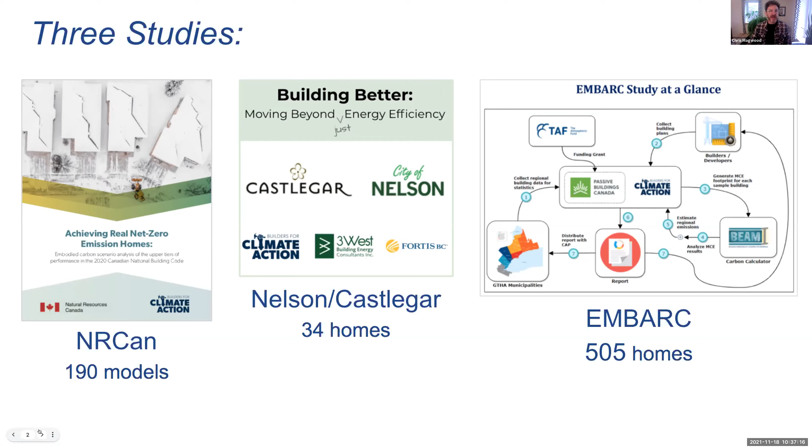And then one case study of an actual building up here in Peterborough at Trent University, where the client, the university, decided to really pursue low embodied carbon materials. And I'll show you how that unfolded.

So a quick recap, if you weren't here last time, the way that all of these calculations happen is we find the emissions information for different building materials and products in reports called EPDs, Environmental Product Declarations. Those are an ISO standard way of reporting on emissions and making sure that the same things are being included and excluded in those reports.

And then we load all of those EPD results into one of two tools. They're kind of the same tool with some slight differences. Either the MCE squared tool from Natural Resources Canada or the BEAM tool from Builders for Climate Action. Our team here built both of them. They're both spreadsheet versions. They use all the same source data. You get the same answers, but there's a few differences in the interface and reporting. Some studies used one and some studies used the other.

So they're both there. And so what we get out of those tools is an estimate of the material carbon emissions. I want to make that really clear. This is very similar to the information you get out of an energy model or a fuel mileage report, where we're taking data that was assembled in a certain way and processing it in a certain way to get a result. It doesn't mean that any of these buildings have exactly the carbon footprint that we're ascribing to them. But what it means is that comparatively speaking, if we make swaps or make different choices in the buildings, we can see what those results will be.

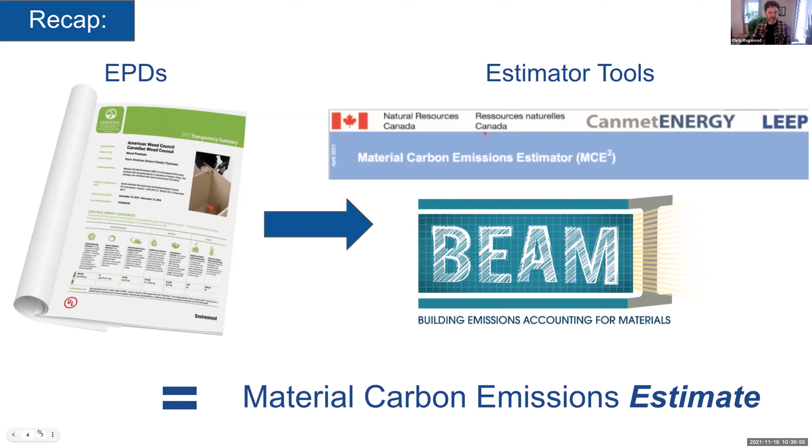So all of the information that we're tabulating for these buildings and these studies is in the cradle to gate or the product phase of life cycle assessment, which is where 70 to 85% of the emissions over the whole life cycle live when you're talking about building materials.

And just some caveats here on the right. We don't have an EPD for every single product. What we have is representation in every product category, but we don't know sometimes a specific brand of insulation versus another brand. What we do know is we have some representation of fiberglass, some of mineral wool, et cetera. The calculations are based on industry averages. So your own practices, how you frame walls and how much lumber you use, might not be identical.

We don't include waste factors or a whole bunch of parts of the building for which we either don't have data or for which we wouldn't be coming up with any actionable results. So right now that includes all mechanical, electrical, and plumbing, fixtures, flashing, sealants, barriers, appliances, millwork, stairs, paints. There's a bunch of the building that we're not capturing. We're not capturing transportation of the materials to a job site or emissions that happen during construction, and we're not including end-of-life emissions. We're including the lion's share of the emissions that happens up front when these products are harvested and manufactured.

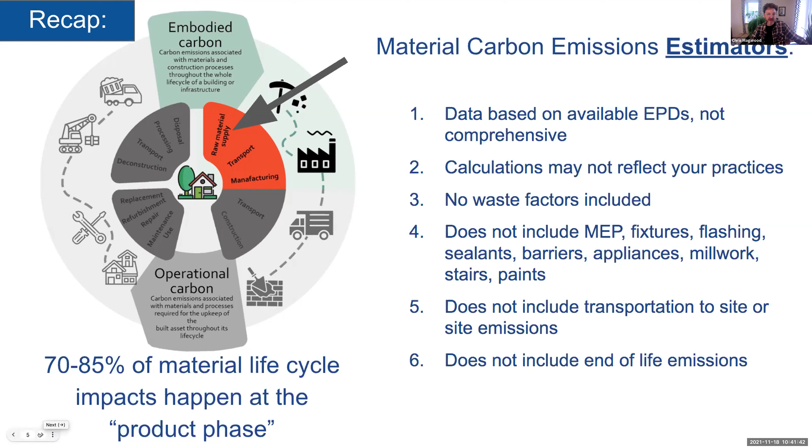So I'll get into the first study, which is one that we did for Natural Resources Canada. And the subtitle to the report is Embodied Carbon Scenario Analysis of the Upper Tiers of Performance in the 2020 Canadian National Building Code. So what we were looking at is, what is the relationship between moving buildings higher up the energy code? So we were looking at tiers 3, 4, and 5.

We were looking at 3 different housing typologies, a bungalow, a 2-story, and a row house. And we looked at 5 different cities. So the energy models for these buildings were done by NRCan based on the climate data for those 5 cities. And then what we did was applied to each house.

So NRCan provided us with a set of plans for what they consider sort of the typical bungalow, the typical 2-story, and the typical row house. And then we chose 4 different material palettes for those homes.

One, which you'll see we always color red in the study, used high carbon materials. So whatever the category we were looking at, whether it was flooring, roofing, insulation, we picked materials that were at the top of the category in terms of highest emissions. Then we did a sort of moderate carbon model where we picked materials that were sort of in the mid-range.

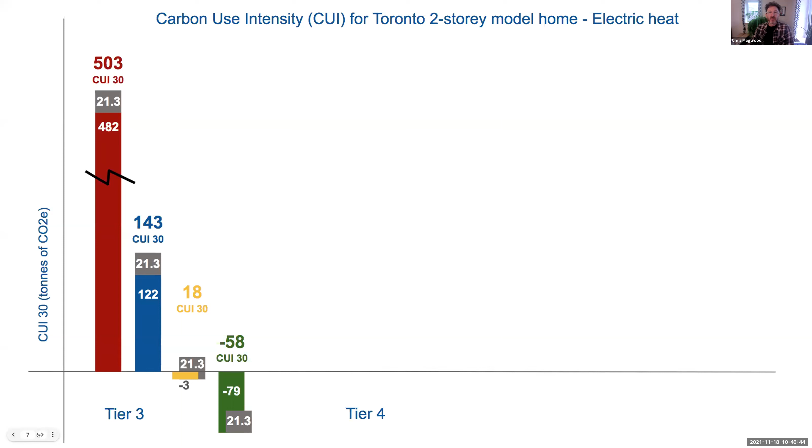So now we move this up to tier 4. Essentially what we're doing is adding insulation. We haven't changed anything else about the house, but in making it more energy efficient, there's no carbon footprint difference to making it more airtight because you're not really adding materials, but you're adding insulation. And so that model shows that for the red and the blue typology, the material carbon footprint goes up some, because obviously we're adding insulation materials that have a carbon footprint. So you've kind of driven that up.

We have brought down the operational emissions, so that's gone from 21 tons to just under 19 tons. But what's interesting is that between tier 3 and tier 4, these two buildings actually have a larger carbon footprint after 30 years than they did in their tier 3 version.

What you see with the yellow and the green versions here is that the carbon footprint looks better after 30 years because by adding more insulation, and in this case the insulation is what's providing that carbon storage, we're actually bringing those figures down.

And then we'll move over to tier 5, and we see kind of the exact same thing happening. The red and the blue models continue to have their material emissions go up. The operational emissions come down, but especially with the red model, it's sort of a net gain of carbon emissions because of those high carbon insulation materials. And you can see the blue model is almost equal here.

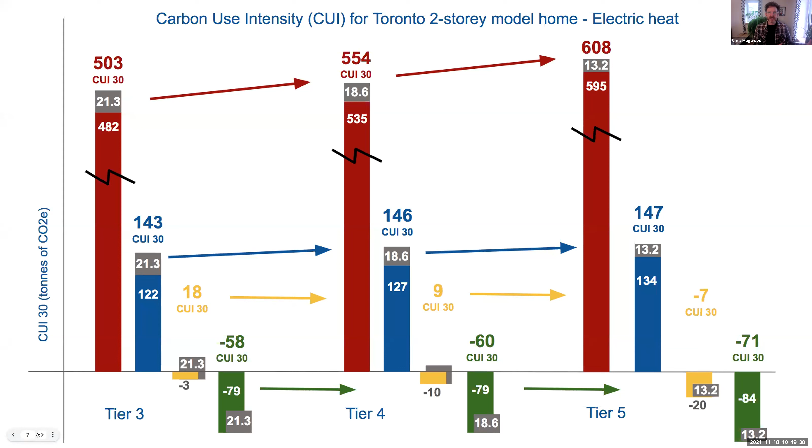And then, as I pointed out, we get the opposite effect if the insulation we're adding is a carbon storing insulation. We're kind of getting a win-win of add more insulation, which adds more carbon storage, which also improves the performance of the building.

Whoops, sorry about the slides there. But in this case, this is the same building in Toronto, but now using natural gas rather than electric heat. So maybe I'll just fill all of these in. Sorry, I didn't have a chance to review these.

So over here, our tier 3 building, the material emissions stay the same. You can sort of recognize the progression in that graph, but the operational emissions have gone up. So if we look back at the previous slide, they were around 20 and now they've gone up to 100. So this is pointing out that not only energy efficiency, but fuel choice and the carbon emissions of the fuel make a huge difference.

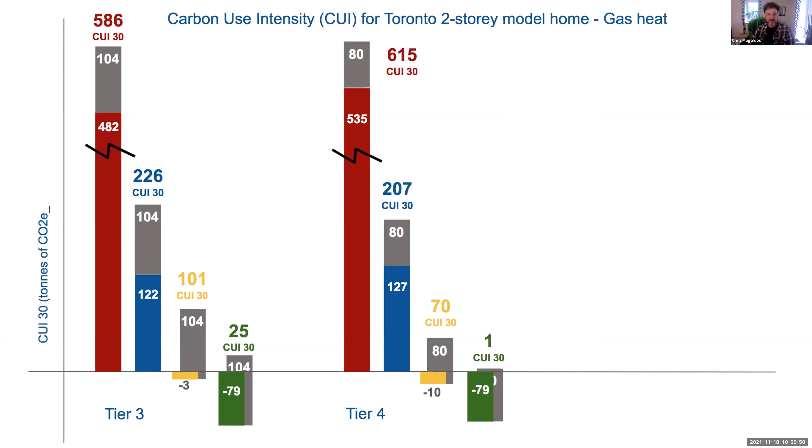But if you look between the Toronto example and this example, what you clearly see is that when the electricity source is relatively emissions intensive, like it is in Halifax, that's the best place we need to intervene. We need to get those buildings onto clean energy, because the operating emissions over 30 years really start to outweigh the materials, whereas in Toronto, the materials really outweighed the operating emissions.

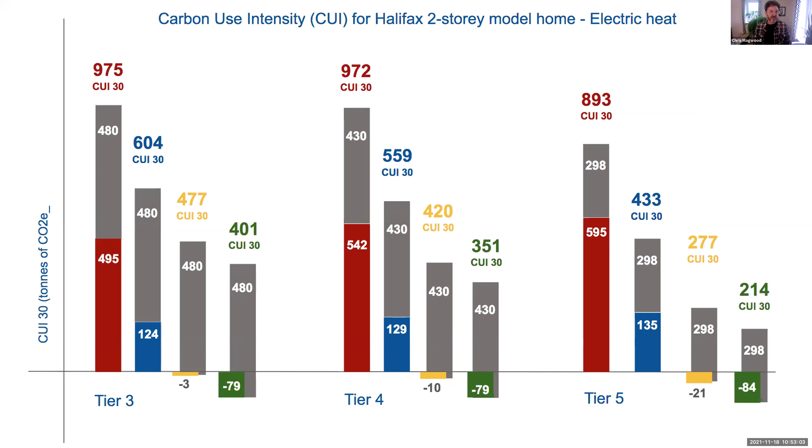And I think that's one of the key things that came out of this study is to say, this is the number we need to care about, this CUI number, and we need to drive it down in whatever way makes sense regionally. So in a place like Ontario, or the results were similar for BC, they were similar for Quebec, if you're dealing with relatively clean electricity and you can electrify those buildings, then our real focus needs to be on the materials.

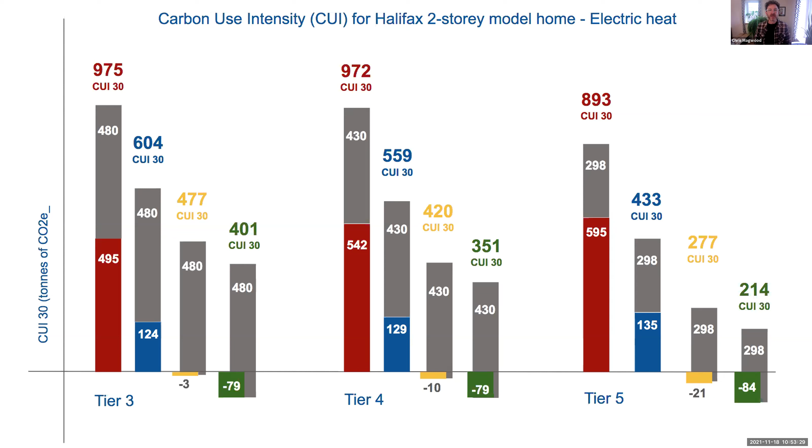If you're in Halifax, or somewhere else that's still using a lot of coal or other fossil fuels to generate that electricity, then you want to look at driving the energy efficiency of the building higher, but also working at getting the actual energy source to be a lot cleaner.

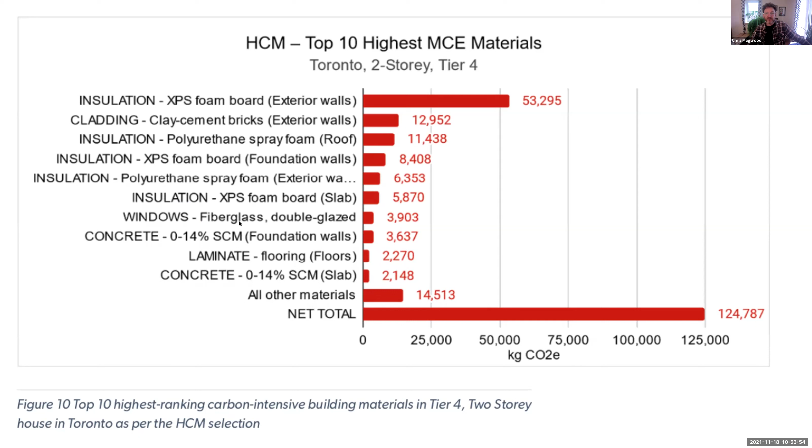And so this is just a really quick look. You'll have access to these slides, so don't feel like you have to take this all in, but this is the top 10 emitting materials for each of the buildings in that Toronto example. So you can see which of the things were kind of driving the carbon footprint of the building high.

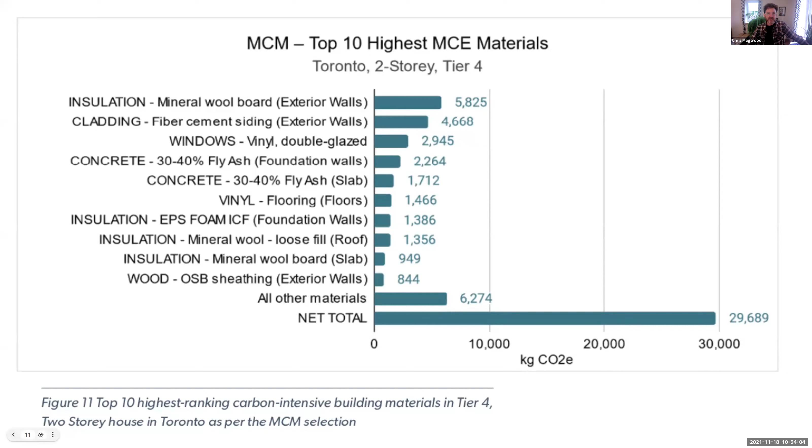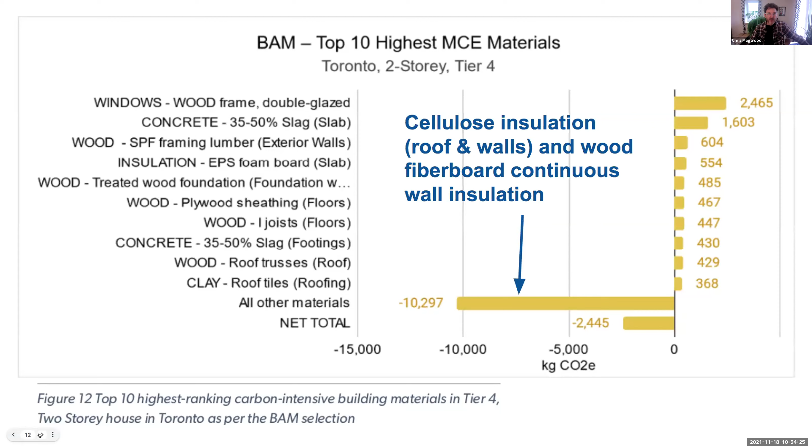And as we sort of move to more moderate levels of emissions, the material palette changes. It changes again here for the best available materials, where the negative numbers, all that carbon storage, comes from cellulose insulation in the roof and walls and wood fiberboard insulation as the continuous exterior. And then when we look at the sort of best possible model, the storage is coming from cellulose in the roof and straw bales in the walls as insulation.

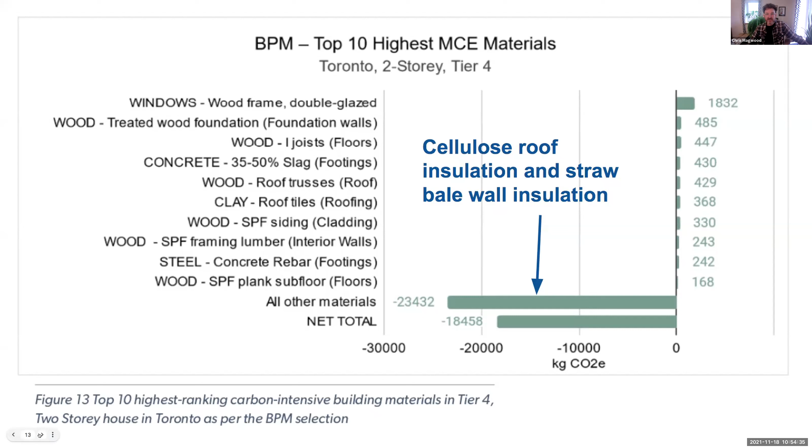So there's lots more. I would encourage you to check out the Enercan study. You can download it from Enercan's website or from the Builders for Climate Action website. There was lots more that we explored there that we don't have time to cover here. The work we're doing for Nelson and Castlegar, it's not quite complete yet, but we do have all the results, so I can share those.

So we looked at 34 homes, which is out of the total of 72 built in the region in that year. So it's a pretty good sample size. It's almost half of everything that got built. And it broke down into the categories you can see there in terms of housing typologies, which was a pretty good reflection of the numbers and types of buildings that get built in that municipality.

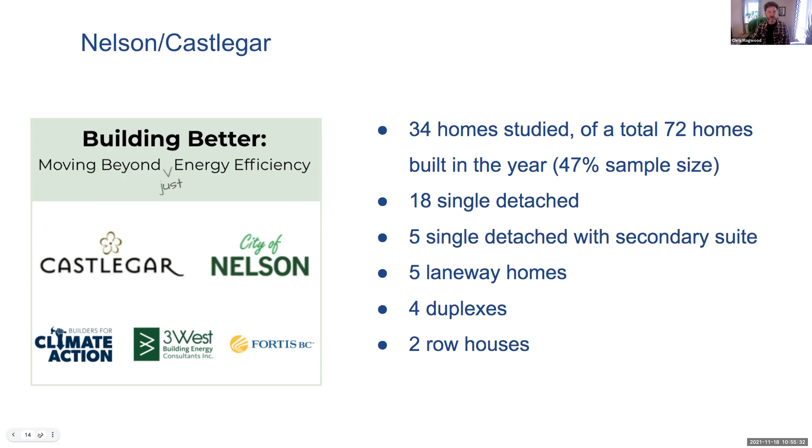So what was interesting is that the average falls pretty much right in the middle of those two, but it was a really even distribution. It wasn't heavily weighted to a few good ones and a few bad ones. If you look at a graph of all the results, it's almost like a straight line from the best to the worst. So there's a real distribution in terms of the overall carbon footprint of these homes.

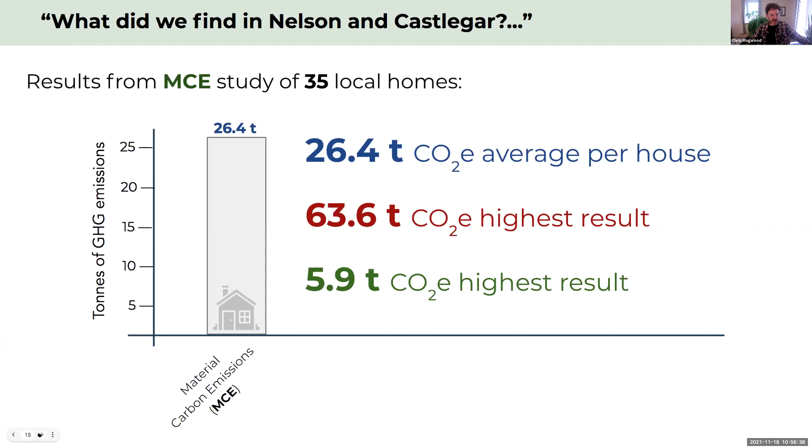And this one was exciting for us because now we're looking at real, as-built homes, and not models like we were in the Enercan study. So we built those models from HOT2000 models that a local energy advisor company, 3 West, had already done for those buildings. So using that, we were able to see that the average operational emissions from those buildings was just about 1.26 tons per year.

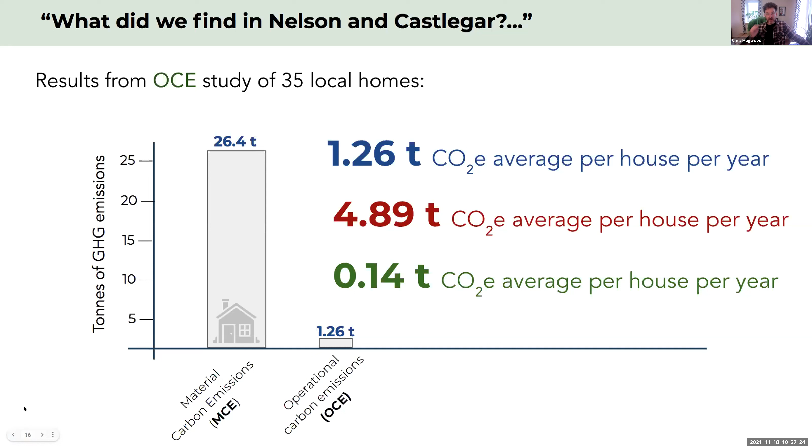But again, there was a pretty wide distribution on either side. The highest one was almost 4.9 tons, and the lowest was 0.14 tons. So again, the curve wasn't quite so even. There were a lot of really low ones and a lot of really high ones. And again, it had to do with fuel source, those that were on all electricity or those that were on fossil fuels.

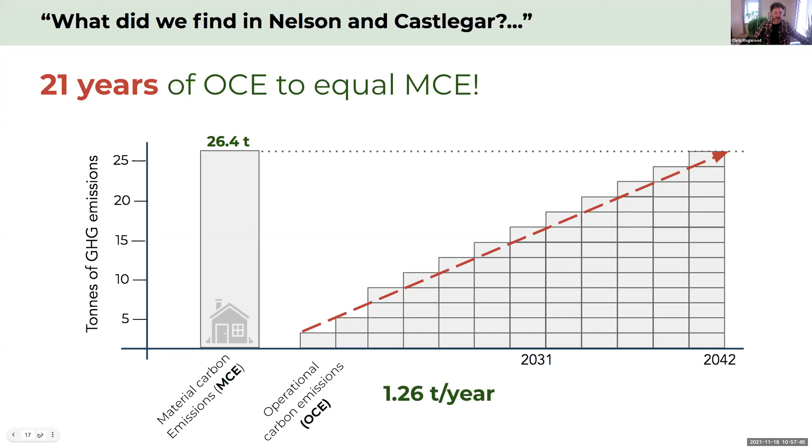But the thing that really drives home from this is that it's going to take, on average, in Nelson and Castlegar, 21 years before the average operational emissions equals the average material emissions. So for municipalities like that who are trying to drive emissions down by 2030 and 2050 targets, what this really points out is that you're not going to be making the kind of impact you're hoping to if you're only dealing with operational emissions. You need to be thinking about the material emissions up front as well.

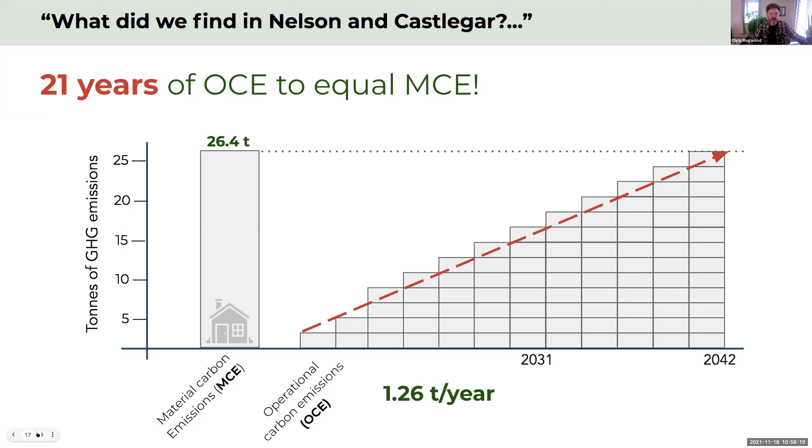And in some of these cases, the ones that were on clean electricity, 12 of the homes came in around that 0.14 tons a year. So for almost half the homes in the study, it's almost going to be 100 years before their operational carbon footprint matches their material footprint. So that makes it even more clear as we start to deal with operational emissions from a fuel source point of view and an energy efficiency point of view. It's just going to make these upfront emissions more and more critical to address.

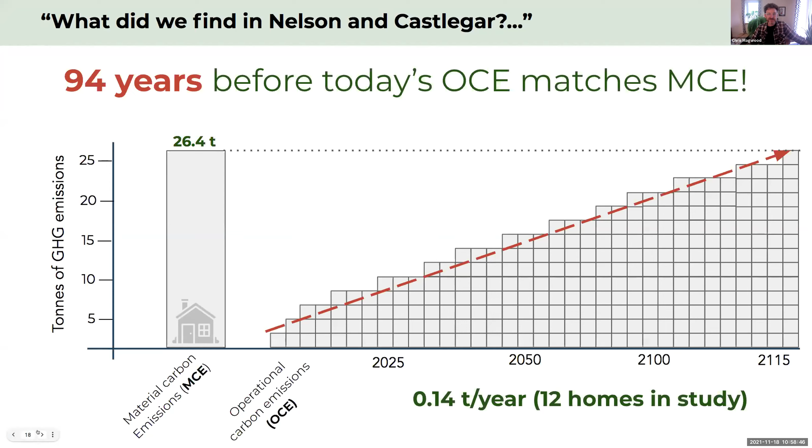Out of the Nelson study, what we were able to do is take an average of all the materials from all the homes. And this was kind of the distribution of the sort of weighted impact. So concrete was by far the highest contributor across the study. Over 35% of all the emissions generated from all of these homes came from concrete. Insulation was the next biggest category. There's a little asterisk there because some of those insulation emissions were offset by the use of cellulose.

So there's another almost 4% that would have been added to that insulation category, but the cellulose that was in that category kind of acted as a negative number on that and brought the overall total down. And then you can see that cladding and interior surfaces were pretty close to each other at just over 12%. And by interior surfaces, what we mean is flooring, wall cover, wallboard, and ceilings. So there's quite a few different materials buried in there, but they're very similar.

Windows was just a little bit behind at 11%, framing at 10%, and then roofing and structural elements were a pretty small contributor. So this was really helpful to start honing in on where are the places where we can make a difference for a municipality like Nelson and like Castlegar. Obviously there's no point in focusing on getting people to think about the roofing. It's such a small part, but we really want to think about things like concrete, insulation, and cladding if we want to start being able to drive these emissions down.

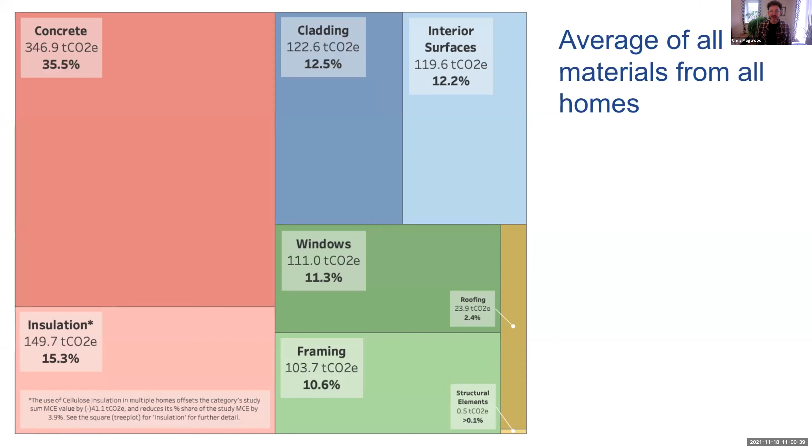And then the last thing that we did in the Nelson study was we took the house with the highest material carbon intensity. It had a carbon footprint of 309 kilograms of emissions per square meter of house area. And we thought, well, let's just switch out a few of those high impact materials. So we switched out in the model the average concrete with a high SCM concrete. So that would be, in the case of Nelson, a high fly ash version of concrete.

We changed the EPS foam insulated concrete forms to wood chip ones. We changed the wall insulation from mineral wool to cellulose, the XPS continuous insulation to wood fiberboard. We changed half of the hardwood floors to linoleum floors, and we put cellulose in the roof instead of mineral wool. And you can see we basically halved that building's carbon footprint with those 6 interventions alone.

And so this is not an endorsement of how somebody should build, or that these are the materials that somebody should be choosing. There's obviously lots of reasons and factors that you would use to decide that. But what we wanted to show was that with, in this case, six material substitutions, we halve the carbon footprint of the building. And so really the point of this part of the study was just to say, we can make a big difference, and it is not that difficult to do. And if these aren't the materials that you would choose, there are other places in the building or other materials you could use to make similar differences.

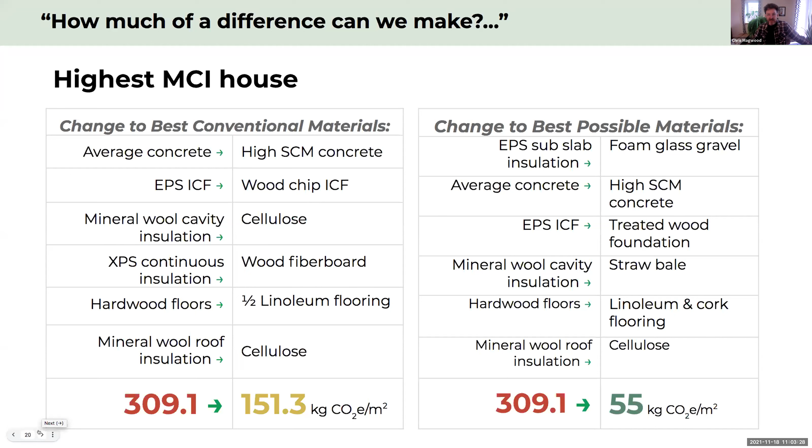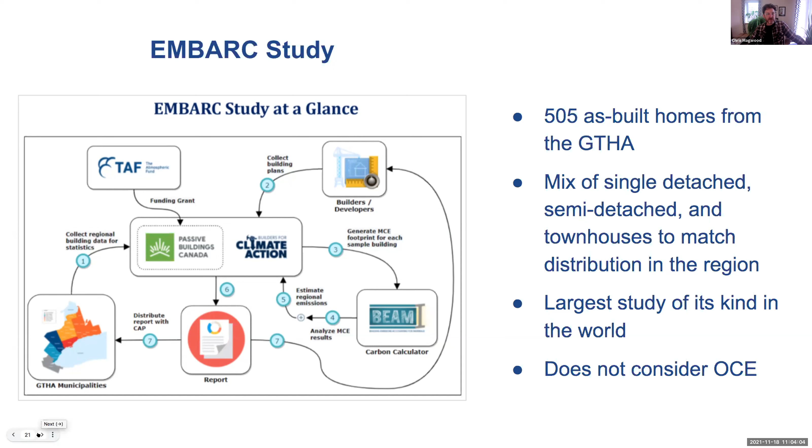And the final study is EMBARC. This is the one for the Toronto region. Here we're looking at 505 as-built homes, so very similar to the Nelson study, but a much larger sample with an appropriate mix of singles, semis, and townhouses to match what building numbers look like in the region. But this study does not include operational energy. We're just looking at the material footprint of the buildings. And like I said, it's early days. In the early part of the new year, we'll have this report out in full.

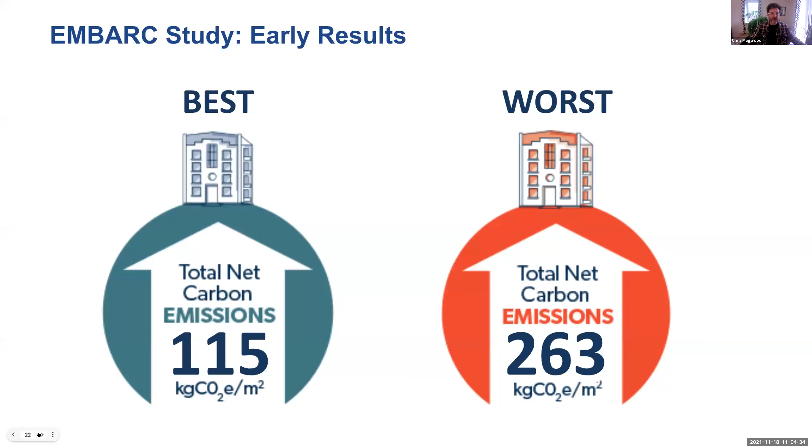But what we know right now is that in the GTHA, of everything we looked at, the best, in other words, the lowest emitting building, was 115 kilograms of emissions per square meter, and the worst was 263. So it was interesting. The best was nowhere near the best of what we found in Nelson, but the worst wasn't as bad as the worst in Nelson. So kind of more of a middle range in the GTHA so far.

So I just wanted to put these results beside each other, just to give you a sense that there's a picture developing here that we can start to learn from. And because these buildings are now coming from different parts of the country, looking at both model and as-built buildings, what we can see is that the range for the highest, the worst emitters, we probably overstated in the NRCan report, because we literally chose all the highest emitting materials, and clearly that's not something that people are doing as a general practice.

The highest results in Nelson and the EMBARC study are between this 260 and this 310 mark. So that seems to be a more typical high end. What's interesting here is that the mid-range average from the NRCan study was 150 kilograms of emissions per square meter, and the average in Nelson was exactly 150 kilograms, and the average in EMBARC is 180.

So those are much closer to being aligned, and in fact, depending on how we count the square meters, in the case of EMBARC, this includes garages but they're not included as part of the living area, so it drives the per square meter up a bit. If we just looked at square meter built area, EMBARC is I think 152. So this is a pretty good indication that the average lives somewhere in this 150 to 160 range. But at the low end, definitely, what we modeled for NRCan isn't happening all that much out in practice.

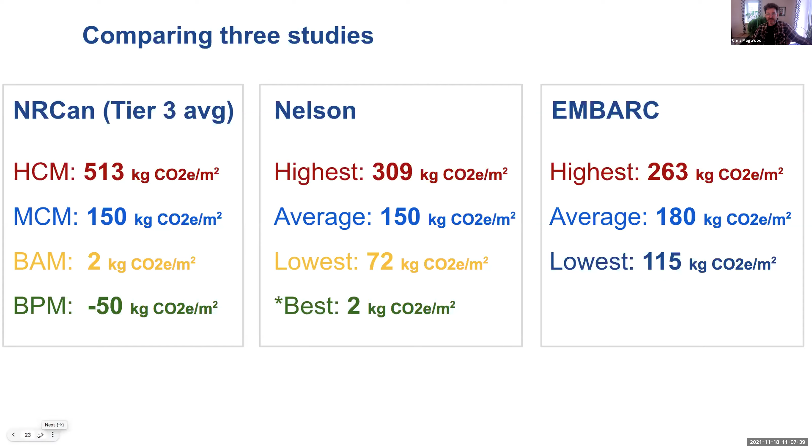The last thing I'm going to look at now is a building that we were involved with at Builders for Climate Action for Trent University. It's their forensic crime scene building, new construction on their campus, and they wanted to achieve a zero carbon building. So we worked with the ILFI's zero carbon certification program, which mostly focuses on the operational side. The building has about 43 kilowatts of PV on the roof, and was designed with really great building enclosure and air tightness to make sure operationally that it would be a zero carbon building. But we came on board to help them do the same on the materials side.

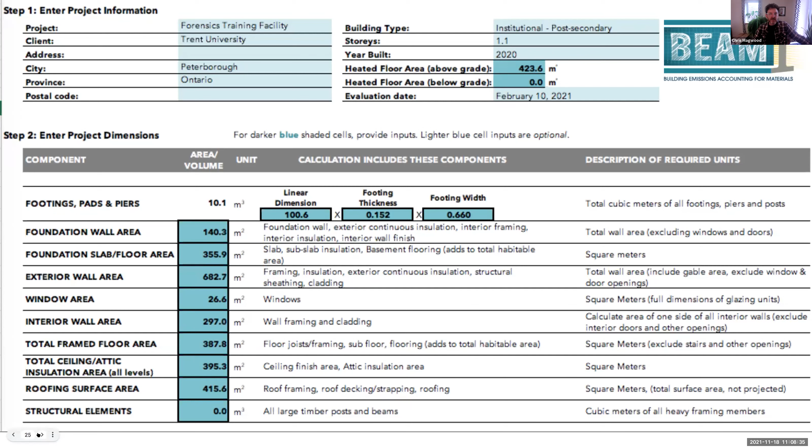So we used the BEAM tool. We entered all the key info about the building into BEAM. And one of the things that's really great about BEAM and the MC squared tool is once you've gone through the whole spreadsheet and selected all your materials, you get this review tab where, by each of the building assemblies, you can see all the materials you chose, their relative carbon footprint, and your total net emissions for the whole building.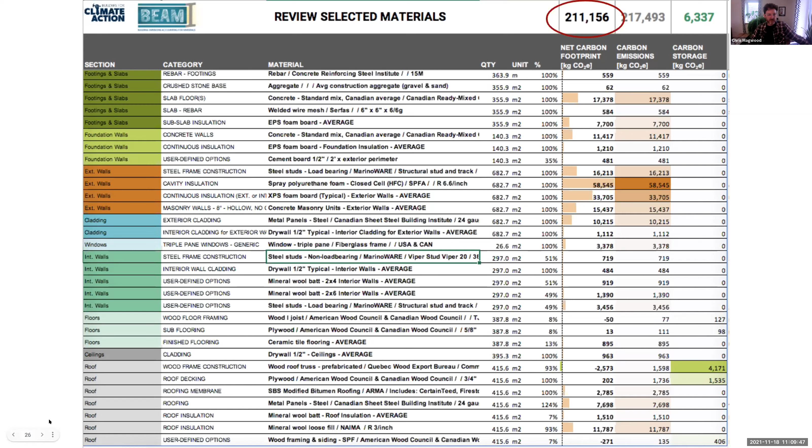And we then worked with the team there using BEAM to point out where we could make material swaps, where we could choose different materials. So in this case, we steered them away from the spray foam insulation and towards a mix of mineral wool batts and hemp fiber batts, et cetera. Through all the building assemblies, we were able to look at what material choices they could make that would both meet their budget and be able to bring down the carbon footprint.

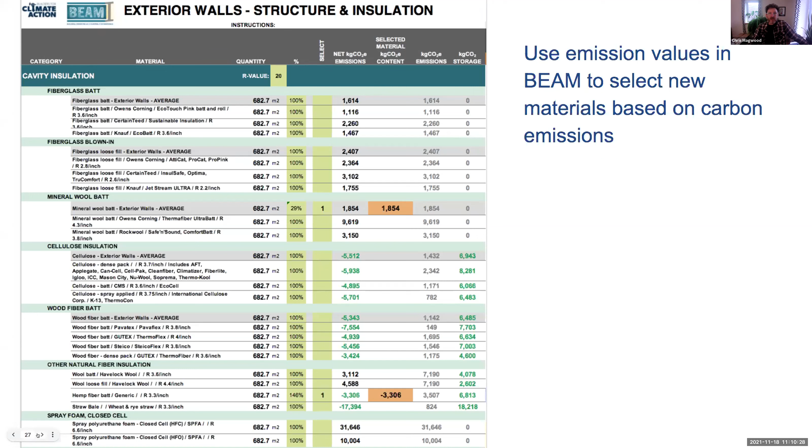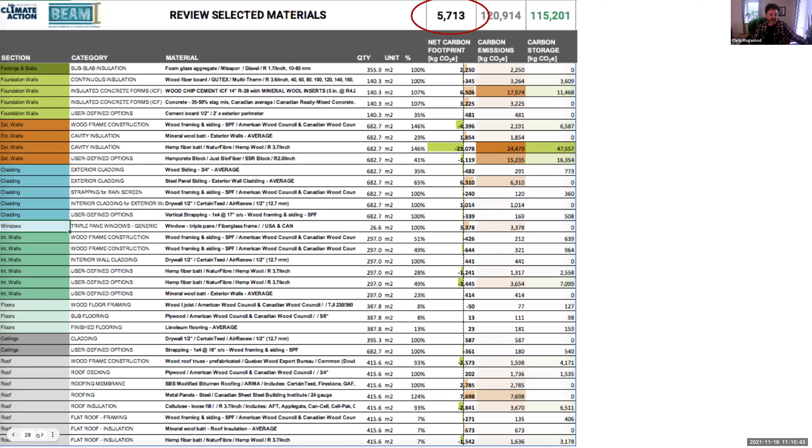So this is the review sheet for the as-built version, and you can see that we've brought the carbon footprint of that building way down, pretty close to getting to zero when you look at a per meter squared basis. And some of those material choices included things like the foam glass gravel as the sub-slab insulation. The walls were these interesting hemp blocks from Just Biofiber in Alberta, and hemp fiber batt insulation from Quebec.

And in addition to really thinking about the materials, we are also really thinking about the building enclosure. So we met passive house levels of airtightness and insulation. And in that way, the building met both the operational and materials side of being zero carbon. So side by side, we ended up taking a building that was bound to have 211 tons of emissions and got it down so that it was storing just under 7 tons.

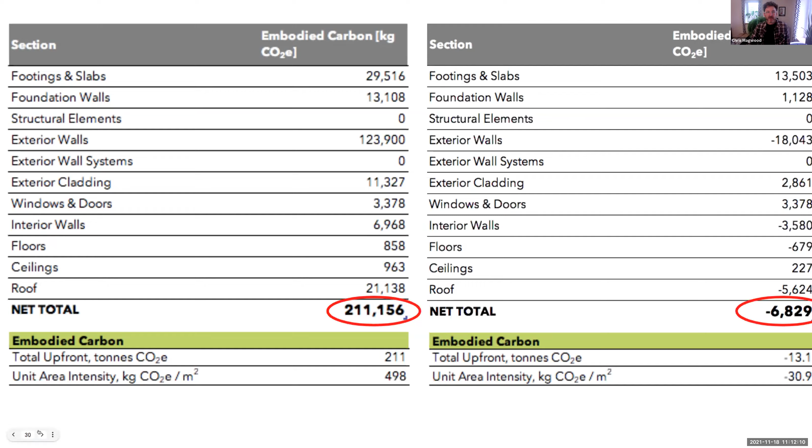And maybe not everybody in every practice and for every building is going to get to that level, but this is what's possible right now today. But if you can look at a building that's going to have over 200 tons of emissions and even get it down to 100 tons of emissions, we think there's a lot of value in using these tools and making this part of the overall strategy of designing and building buildings. So that's the finished building up at Trent. And that's the finish of my part of the presentation.

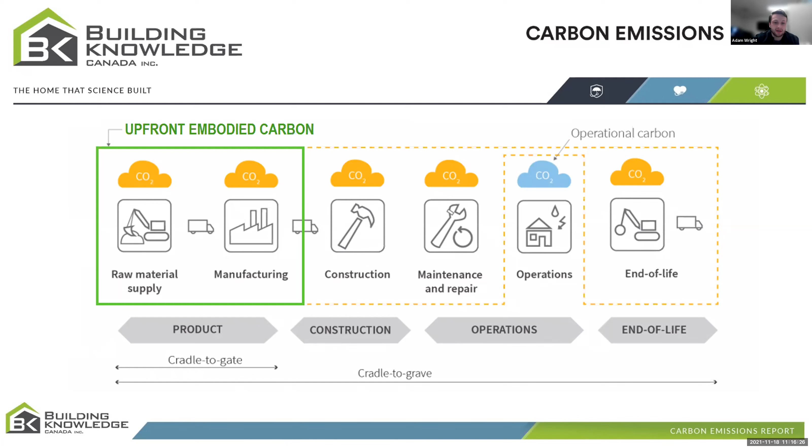So our initiative in this project was to provide a simple pathway for the developers to reduce their embodied carbon impact through smart material choices and applying these tools towards future construction. The tools enable us to measure and manage the amount of embodied carbon that was associated with the building materials and then choose lower carbon material options. And what we have found so far is that by simply asking suppliers for the low carbon options, we've been able to procure materials that meet our reduction targets and performance specifications with zero to minimal cost premiums.

So whether it is redeveloping an existing house or if you're building new, providing a design pathway can allow the builders to see the individual impacts of the material choices, and they provide similar low carbon product alternatives that can be implemented. So by starting with the design process, we are actively beginning a greener method to approaching construction, and considering low carbon structural materials such as green concrete, recycled steel, mass timber framing, and many others, we can make a huge impact on reducing the total tonnage of the carbon that's emitted. This also encourages the use of fewer materials in the buildings, and it can bring to light areas where repurposed materials can be substituted and ultimately reduce the developmental costs.

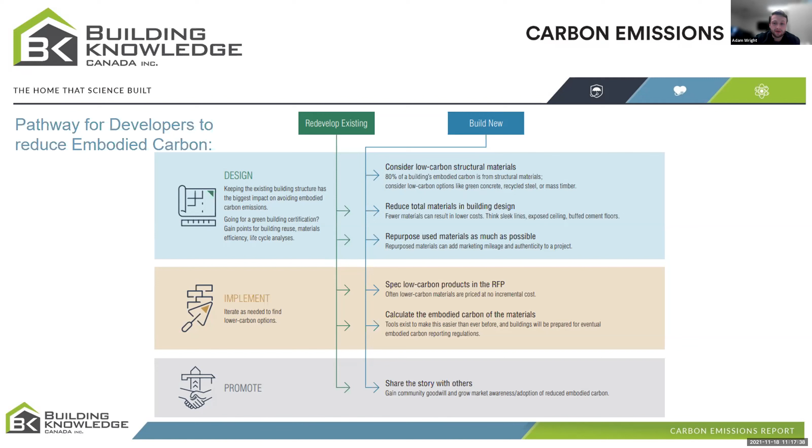So unlike operational carbon, embodied carbon can't be reduced in materials once a building's construction is completed. So as buildings continue to improve operational efficiency, embodied carbon will become a larger portion of the building's overall lifetime emissions. And although awareness of this topic is still growing, understanding and applying the embodied carbon is a necessary step to mitigate climate change.

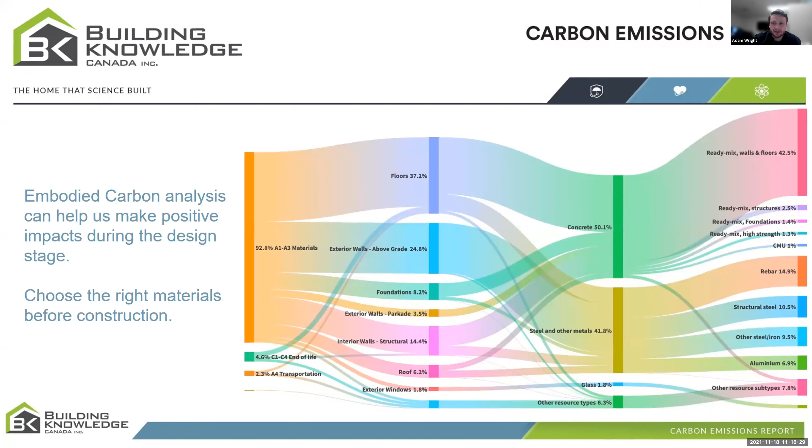Regulations are coming, with that being said. So as more cities are committing to decarbonization, and because buildings are such a significant contributor to emissions, it is expected that the climate action plans will limit both operational and embodied carbon. So staying ahead of this policy curve and adopting low embodied carbon practices now protects firms from the challenges and the cost of transitioning in the future. Because once a carbon tax is passed, developers will have a strong financial incentive to take action and reduce embodied carbon.

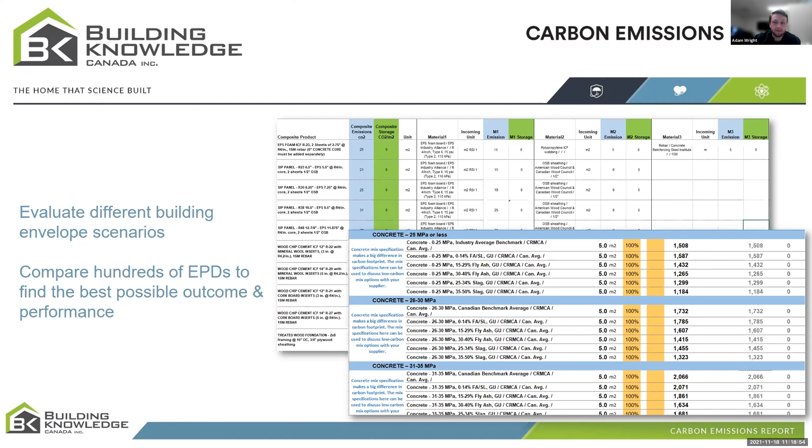So this is how BKC can help. Our tool can evaluate multiple building envelopes while comparing hundreds of EPDs from the NRCan calculator and Beam tool, where we can find the best possible products and performance results of the home. And our report can condense this material data into a readable format, and observations, improvements, and any comparisons can be made between the two in order to select the best possible design. So I'll pass it back on to Andy now, where you can talk about the report a little bit.

Yeah, thanks, Adam. So basically what we've done is we're trying to develop a report that uses both the tools of what Chris has created, the Beam tool and the NRCan tool, to give a builder a picture of the impact on the home. So for instance, we want to look at evaluating each new home type.

Oh, if we can just go back there real quick, Adam. If we can evaluate each new home type, whether it's a single detached, an attached home, or a MURB, what we're doing is we've set a simple metric where we look at the upfront embodied carbon, which is what Chris has been talking to us about. And then we look at the operational carbon, but we look at a 50-year lifespan.

Now, we get it, 50 years is way too long. We have a climate emergency. We need to do things sooner. The reason we've chosen 50-year lifespan is because in the National Building Code of Canada for Part 9 low-rise housing, 50 years is the approximate assumed lifespan of a low-rise residential product. So as a builder, developer, designer, when you build that asset, the expectation is it is going to have a 50-year lifespan.

Now, we understand when it comes to operational that there's a lot of other things that are going to come into play. Down the road, 50 years out, folks, hopefully we have incredibly clean grids with fusion and all sorts of things. But for now, we're building an asset. So what we're doing is we're showing the total 50-year footprint of the upfront embodied carbon plus the total footprint of the operational carbon reduction.

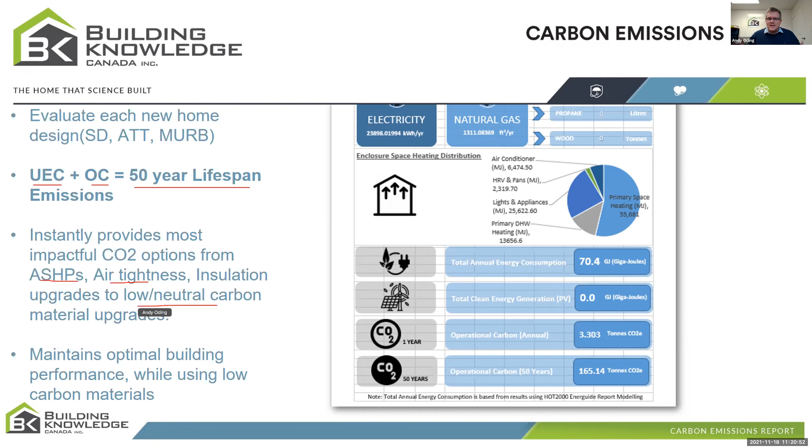So again, we look at these things. And from a developer, designer, builder standpoint, we need to know when it comes to reducing carbon emissions, do I look at air source heat pumps, or do I look at air tightness? Or do I look at low or neutral carbon materials? Where do I start to make an impact in designing and developing this aspect? So go ahead, next slide, Adam.

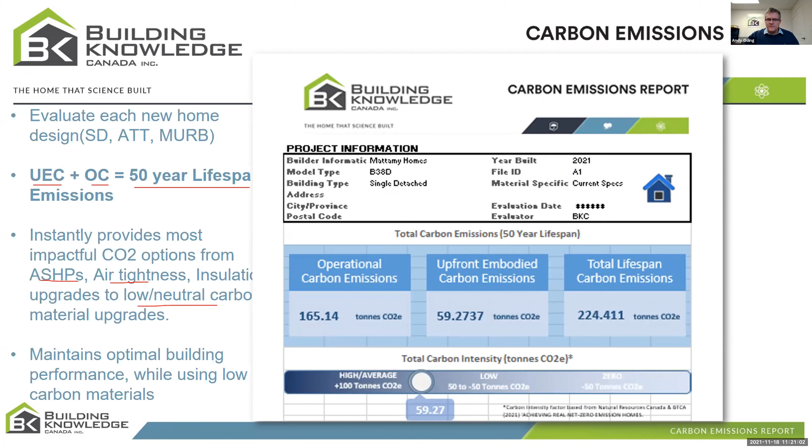So what you have here is, again, using the tools that Chris and Sona developed, for this single detached home, you would have tons of operational carbon emission over a 50-year lifespan. And again, we can look at 20, we can look at 30, but let's use the National Building Code. We have a total projected operational carbon of 165 tons of emission. We have an upfront embodied carbon total of 59. And when you bring those totals together,

the total lifespan carbon emissions then becomes 224. In the graph below that, we can provide the total emissions density in kilograms per meter squared, but really the big number that we're trying to look at is this number here, which is the operational plus the embodied at a 50-year picture. Next one, Adam.

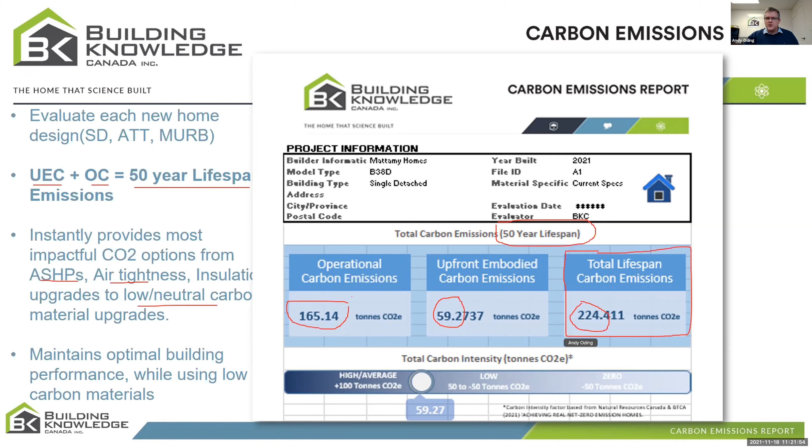So you can see here, this is a comparison that Adam gave. This is basically a building code based home using building code based products. And you can see that here we actually have a total lifespan carbon reduction going from 224 down to 199. Next slide. Next fly-in. There you go. And so now we have a 15% reduction in carbon, and we haven't even touched the operational side yet. And this is just simply from a small change to, let's say, the concrete going to a 25 or 30% SCM or something like that. Go ahead, Adam.

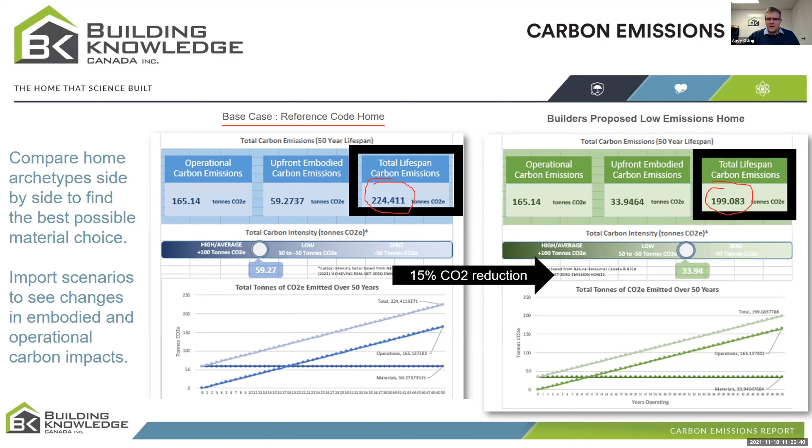So you can pick that one up. So yeah, this is definitely why it's so important to focus on the materials that matter and to have the right data when doing so. So if nothing is done to reduce our embodied carbon in buildings, it is highly unlikely that the emissions target necessary to keep global warming within 2 degrees will be met.

So with the use of these low carbon analysis tools, we can now identify the hotspots in the building where improvements can be made, and the team can likely find an opportunity to reduce this embodied carbon through smarter design, all without a rise in the cost. This outcome requires a focus on the material carbon in the project from very early stages and a willingness from the developer to ask the right questions to the contractors. And perhaps the most compelling feature of the embodied carbon reductions in real estate is the potential for significant progress without much upfront green premiums.

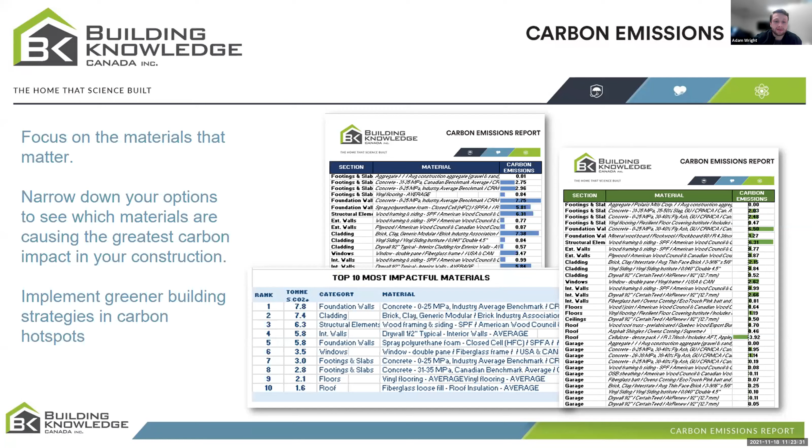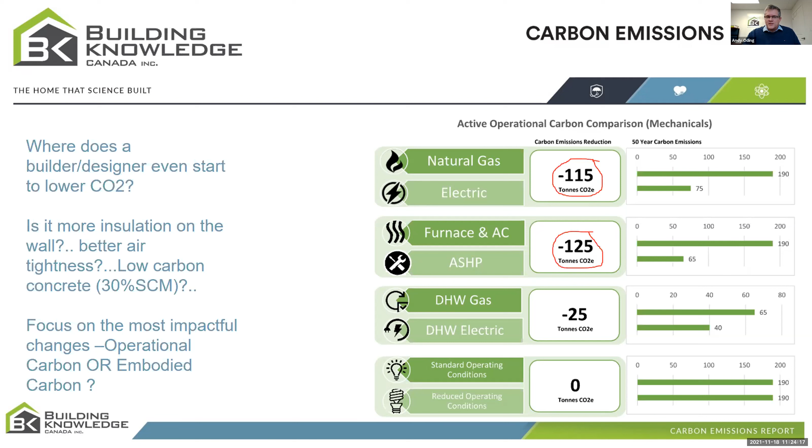That's pretty substantial. If you were to go from a furnace and air conditioner straight to an air source heat pump, you could see 125 tons over a 50-year span. Domestic hot water, if you were to move from a gas to an electric over 50 years, it's 25 tons. Go to that next slide, Adam.

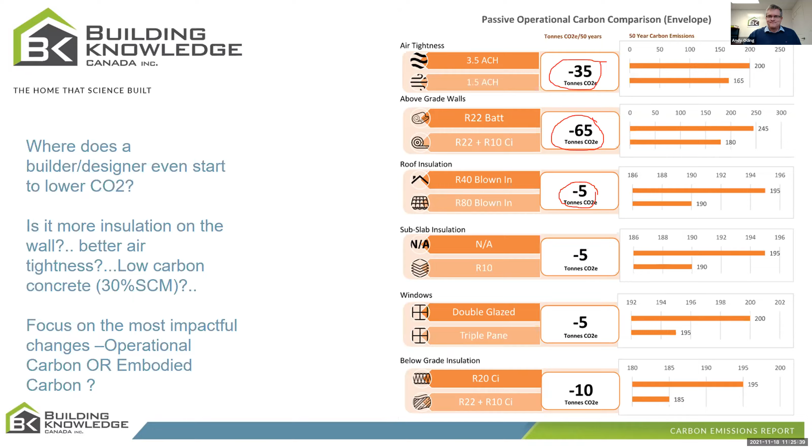Thanks, Adam. Awesome. So overall, just to finish it off, I would just suggest using the concept of greener concrete mixes, looking for the low carbon XPS insulations, insulation values that have low carbon blowing agents, and switching from an HFC to an HFO agent for putting in the insulation values. So we can make huge impacts on carbon emissions with minimal changes. And we leave it up to the developers now to implement these and try to make a change for the environment.

Sweet. So yeah, that's just Adam's information. We've been asked quite a bit lately to do some total carbon emissions reviews of product types. So we're glad to help. Obviously, there's access to Chris's tool and the work that he does, access to the NRCan tool through energy advisors and others. I'll be glad to help with that.

Adam, I want you to go back just a slide quick, because I think there's something that really aligns and it's important to focus on here, because Chris hit this point too. There are some pretty simple low-hanging fruit that can make a significant impact on lowering carbon emissions, and it doesn't take much. SCM, Adam and I are recently working with a sizable developer. They've been in conversation with their concrete supplier, and for a 20 to 30% reduction in Portland, using an SCM type of cement or admixtures, it was a no-cost change.

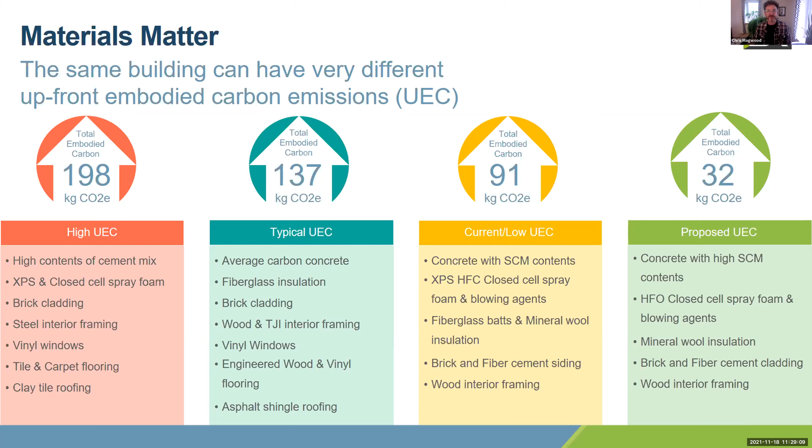So we do have a few questions, but I'm going to start with the first question. I know I'd asked you this last week, but if anybody's new on this week, we could get some clarification. So we have a number of industry leaders who are spending a lot of money on research and development to improve products, reduce carbon emissions, and some that off the top of my head are like Owens Corning, with various insulations. They're coming out with some new innovative products, and we've got concrete companies, I believe Lafarge maybe. And so these different companies are coming out with these new technologies.

So what I was wondering if you could answer for the audience is, as you get more EPDs from these companies, as they launch these new products, what is the frequency, or what is the plan for updating the MCE squared tool to incorporate these new products and materials? Yeah, probably quite frequently, because there are more and more EPDs coming. So the tools, both of them, are about to go out to the public towards the end of this year. And so I would imagine, with NRCan, we've already talked about a 6-month update. So I would say for a while, we'll be on an every 6 months cycle of doing that.